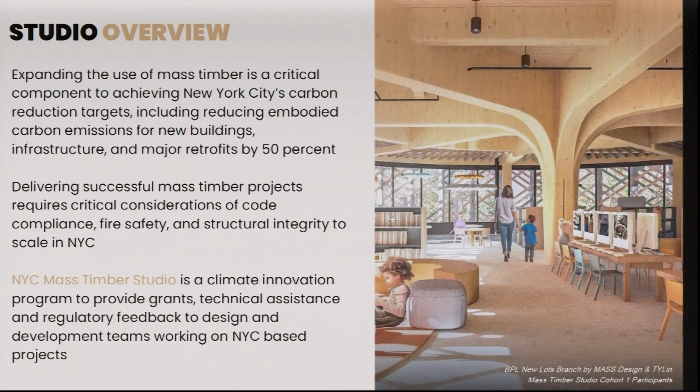Before we dive into presentations, I'd like to take a moment to frame what tonight is all about. The Mass Timber Studio is a climate innovation program designed to accelerate the adoption of mass timber safely and soundly within the 5 boroughs. Through grants, technical assistance, and regulatory guidance, the studio helps project teams navigate feasibility, design, and permitting challenges while building connections across industry and government.

Our objectives are simple, yet ambitious. The goal is really to advance real-world projects, identify barriers and enablers to mass timber construction, and generate insights that inform policy and market readiness. Ultimately, a lot of this work lays the foundation for a regional mass timber economy.

Cohort 2 represents 7 active projects across all 5 boroughs, spanning 800,000 feet of proposed development. These projects range from libraries and schools to affordable housing and civic rec centers. Many are located in environmental justice areas and showcase both ground-up construction and adaptive reuse.

As you listen tonight, I'd love everyone to pay close attention to how these teams are tackling design challenges, navigating regulatory pathways, and exploring materiality in ways that could transform our city's built environment.

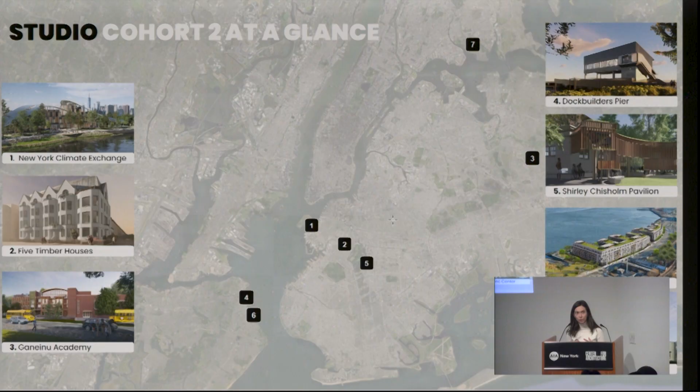And with that context in mind, let's now move into our first set of project presentations, focused on the intersection of design and code. These include the New York Climate Exchange, 5 Timber Houses, and Ganeinu Academy. Please join me in welcoming our first presenters to the stage.

Hi, everyone. Thank you for being here today. My name is Elifmina Mizrahi, and I am the Capital Project Manager for the New York Climate Exchange.

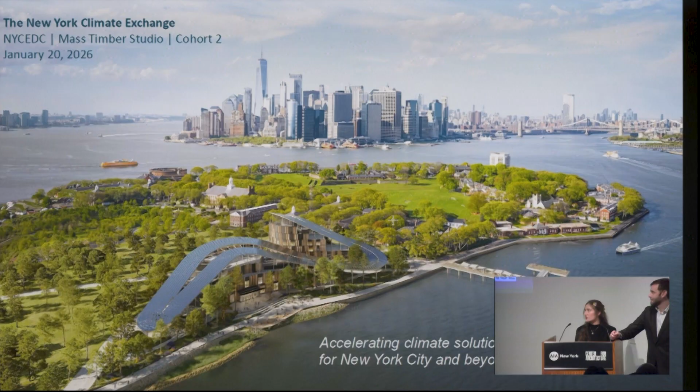We are so thrilled to be part of the second cohort of the EDC Mass Timber Studio, and we want to thank DOB, FDNY, and all the studio partners for making it possible. Today, I'm going to be talking a little bit about who we are, why we chose to build in mass timber, and what the studio enabled us to accomplish.

So who we are: we're a nonprofit organization focused on tackling the climate challenges facing our cities, and we're doing this through a 2-pronged approach. First, we're building a partner network, because to do anything in this world you need collaboration, and to fight climate challenges you need even more collaboration. Second, we're building a physical place for all that collaboration to happen. So we hope you join us there in 3 years.

Our network of partners is really a cross-section of who we think is needed at the table to solve these climate challenges. And if you look at our project site on Governor's Island, you'll probably notice 2 things. One, there are no bridges or tunnels that connect our island to the rest of the city, which means we have a lot of construction challenges unique to our site. Second, it's a relatively small campus on a relatively small island, but our ambitions are much, much larger than our square footage.

And like previous speakers have said, we recognize that New York City is a leader when it comes to construction, development, real estate, architecture, and we want to build this project to set precedent, to show people what is possible with mass timber.

Our project mission is really threefold. We want to advance urban resilience, we want to decarbonize our cities, and we want to build on the public nature of Governor's Island. The Trust for Governor's Island and others have done an incredible job making it a hub for education and inspiration, and we want to build on that feeling you get when you get to the island.

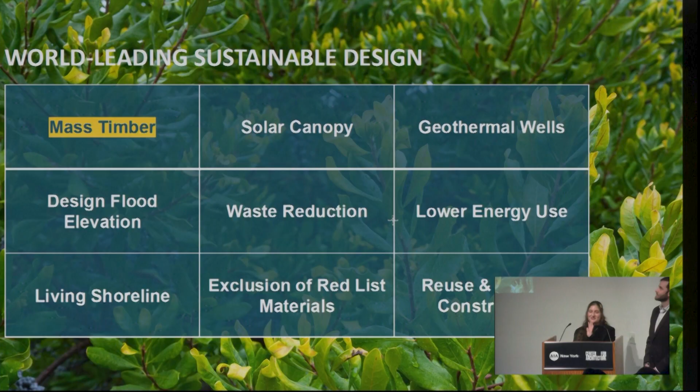Mass timber is only one of the components of our project. To really have a world-leading sustainable design, you have to have a comprehensive approach. So I'm not going to get into the details of what's on this slide — today is about mass timber, but it's only one of our components.

I want to take a moment to shout out our incredible team. I have the chance to work with them every single day. SOM, Skanska, MNLA, Buro Happold, Langan — these are real leaders in innovative and sustainable construction, and we're so lucky to have their expertise on our project.

So a little bit about our project: it's 2 large-scale commercial mass timber buildings, about 140,000 square feet total.

One is a convening center, one is a lab and classroom building, a research and education facility. These are the two mass timber components, but we're also adaptively reusing a historic structure, building 4 acres of open public space. We have on-site geothermal and solar, and we're partnering with the city to build a resilient waterfront.

We're hoping to serve undergraduate students, researchers, and also the general public. We want to invite people in and have people learn about what we are doing.

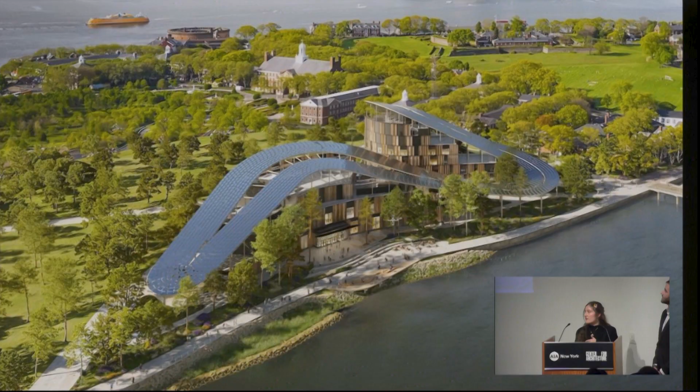So we are on the Brooklyn side of Governor's Island, right off the ferry terminal. This is a close-up of our mass timber convening center right on the waterfront. And we are actually so lucky to be at the front gate of the island.

So we want to engage visitors, whether they come to visit us or whether they are just passing by, through a very porous first floor where people can come in. And our interiors very much celebrate mass timber, showcase mass timber.

We want you to feel like, wow, why aren't all buildings like this? Why doesn't it feel great to be inside buildings?

So before I pass it to my colleague Connor from Skanska to talk about our project-specific challenges, I just want to take a moment to acknowledge the incredible work that EDC has done. It's really hard to be the first mover in anything. No organization wants to be the first mover because it's complex, it's costly, and it's encouraging to see that the city acknowledges this and is trying to help smooth the path forward for our project and also for all the other projects that are going to follow afterwards.

So we're thrilled to be part of the studio, and I'll pass it over to Connor to talk about our project-specific challenges. All right, thanks. Like she said, I'm Connor Devine, a project executive with Skanska, who's the construction manager for the Climate Exchange, one very small piece of a large dedicated team.

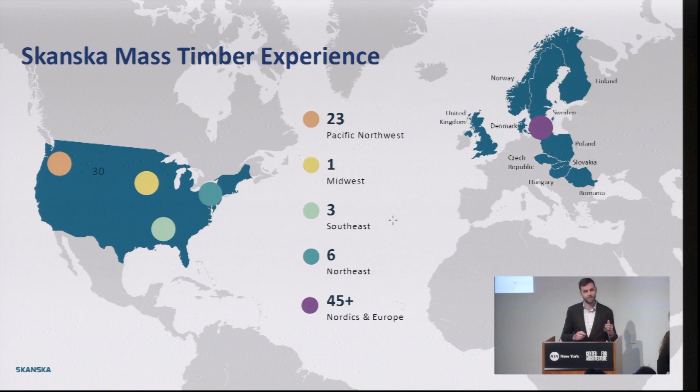I just want to start here. Mass timber experience for us in particular, we have a bit of it across the country and around the world, and that's really important for building mass timber at this scale of the Climate Exchange in New York City, because we have a lot of places to call on experience, whether that be the regulatory environment in a different city, state, country, whether that be construction best practices, design optimization, material sourcing, whatever it may be. There's a lot of people that have done this elsewhere that we can call on.

And then just to blow up locally in the Northeast, we've done a couple mass timber projects. Maybe unsurprisingly, a lot of them end up being in the higher education space. That seems to be where this is gravitated to most, climate exchange in a similar field. We're working on the Tompkinsville Esplanade, which is very much adjacent to one of the projects you'll hear about a little bit later today. That's the first project that we're doing mass timber in the DOB's jurisdiction. Underway, it'll be an interesting project, and we're excited for that as well.

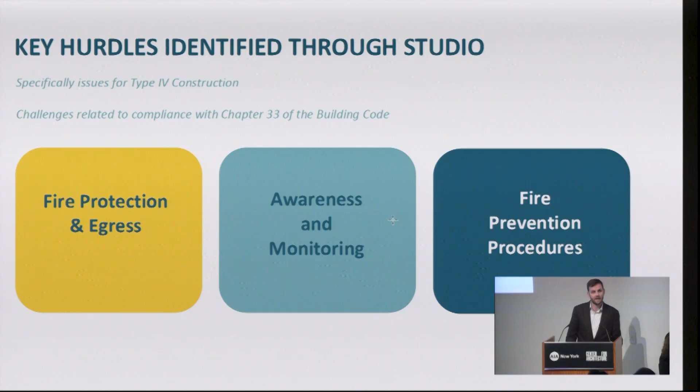As far as the overall studio, a lot of people probably have a lot of the same comments, but I think for us, the hurdles that we're trying to work through really broke down into two areas. One of them is the DOB's requirements for type 4 mass timber construction, in addition to just the general requirements of the International Building Code. And the second being the Chapter 33 requirements of the New York City Building Code, those being maybe not so much architecture, but safeguards during demolition and construction. So that's less the what we're building and how we're building it, the rules we have to follow. And again, there's been some specific requirements appended to that chapter specifically for type 4 buildings.

I'll just talk about a few of the things that we're facing, a couple of hurdles for our building in particular, and others in the cohort had similar things. The first for us is stair towers. As the code is written, permanent stair tower structure independent from the timber needs to be at least 2 stories above the working floor. For the climate exchange job, SOM put together a holistic approach to integrate timber throughout the whole structure to make that structure as sustainable as possible. So through the studio, we continue to work and discuss with DOB and FDNY on how can we go forth with that hybrid structure and make this truly as sustainable a building and a structure as it can be.

We're going to skip that, we're short on time.

Temporary protection of connections is another huge one. I think everybody in the studios had something to say about this, but effectively, the way the code's written, any connection needs to be protected at the end of a shift. Apply that to a steel building, and any connection would have to be spray fireproofed at the end of shift. That's the one-for-one comparison, so practically speaking, that's tough to do and costly.

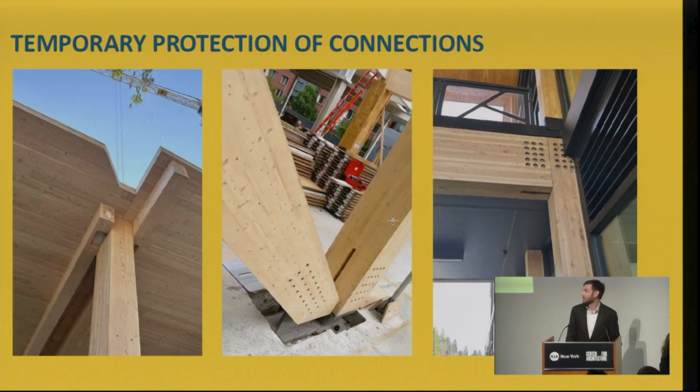We're really excited to have brought our design assist partner, Metropolitan Timber, on board. Eric's in this room somewhere, and their partners are all the way in the back, Aspect and Element 5. That team, along with SOM, has really dove deep into detailing and connection design so that the connection is made and the fire rating is there, rather than having to do it after and add all that cost. We're excited with the way that's going.

There's no opportunity for just-in-time deliveries, and no opportunity for staging trailers throughout the day. So we've had a lot of conversations via the studio, especially with the FDNY and the DOB, on how we can approach this given our specific constraints of being on an island. We have a couple different options we're pursuing, and we're excited to narrow in and agree on one together to make this job happen as effectively as we can.

That's all we have time for. It's a short presentation, by no means everything we discussed in the studio, but we want to say thank you to EDC for putting the studio together, to DOB, FDNY, and all the other partners that lent their expertise or lent their ear to hear about our hurdles and try to solve them. We're not there yet, but this is the starting point of a long process. Thank you guys for organizing this.

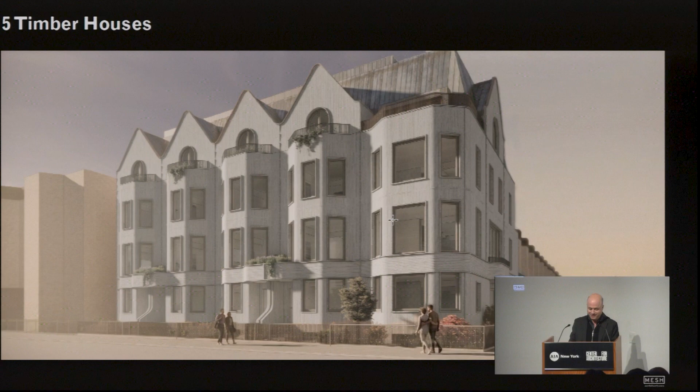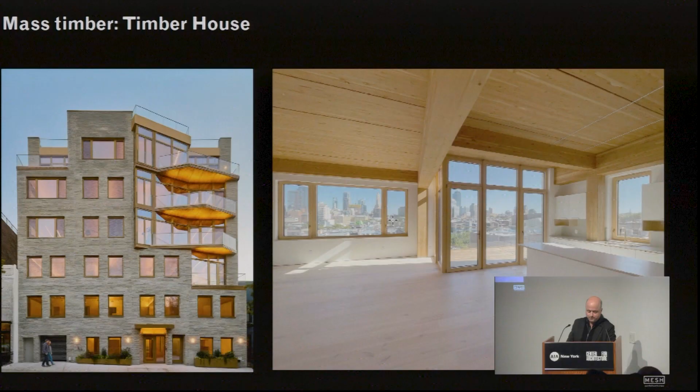We've been interested in doing passive house design, low energy house, for a long time, well over a decade. Then about 7 years ago, we got into mass timber construction and design. We've completed one, this timber house in Park Slope, finished a few years ago. We have a couple more happening: one house in construction and other houses in design upstate, in addition to the one you're going to see tonight. This is the one in construction.

Mass timber construction is an unusual process if you're used to the way concrete and steel buildings are built here in New York City. It's very different, and I think we're all still figuring out how to do it best. That's why doing this project, which consists of 5 houses in Park Slope, is actually instructive even for other kinds of buildings like the multifamily buildings prevalent here in the city, because as we learn techniques and assemblies, we can take those and use them in other places on other projects.

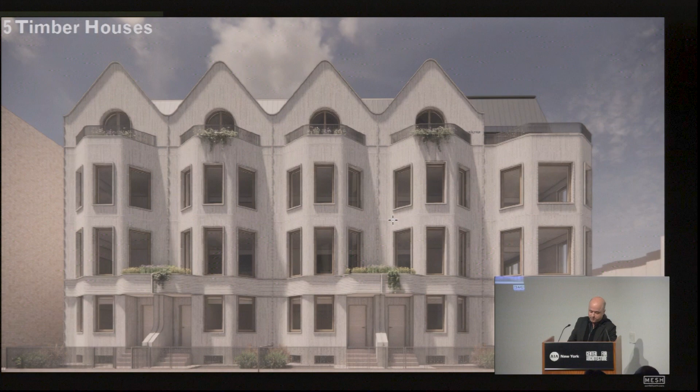So we wanted to know on this project, it was a program for 5 houses, can we do 5 CLT houses? If you're familiar with mass timber, CLT are those thick slabs made out of dimensional lumber. It's a material that's strong, beautiful, goes together quickly, has so many beneficial attributes, and of course very sustainable as a renewable resource. So could we build houses out of CLT, which we were not able to previously do?

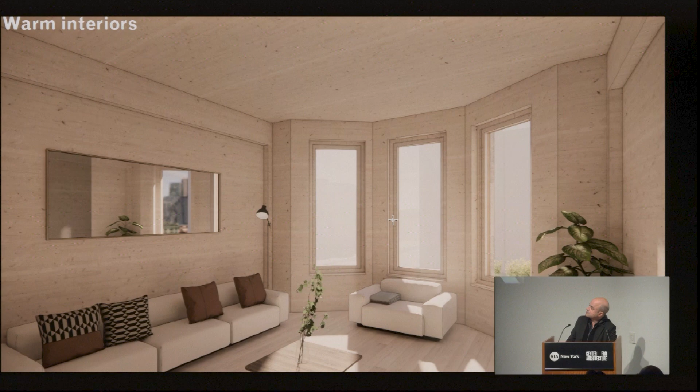One thing you get with mass timber is the structure being the finish of the house inside. Now outside you can't expose the mass timber except in select ways because of weather exposure. But it's great to have this material, which is the actual structure, be the interior of the house. It's both biophilic and it also saves material, because instead of having to put studs, sheetrock, spackle and paint, you can just finish it with the material that's actually holding the building up.

So we came up with different assemblies for how we're going to clad our building. Again, it's going to be built to passive house standards, so we have air sealing and insulation. This is an ultra low energy building according to the DOB's definition of that.

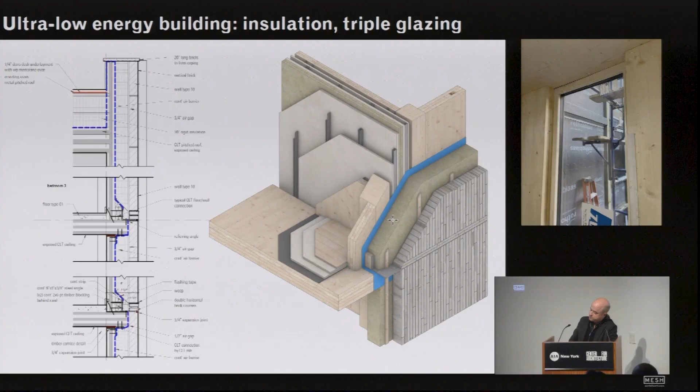So we spent a lot of time really working on the section of the house, how we do the envelope, and in fact how we do the space between the buildings, the houses themselves. We also have advanced systems here.

Everything, of course, is electric. We have very sophisticated air-to-water heat pumps—these are the ones that don't take the refrigerant out of the immediate environment of the machines themselves, and just circulate cold or hot water around the house, which is safer than delivering refrigerant all around the house. We use ERVs to provide conditioned fresh air at all times, and we have solar panels on the roof.

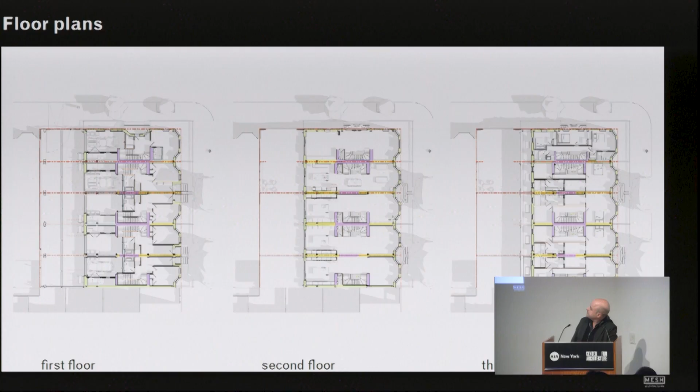The outside of the building, as I said, can't be timber, so we had great success on our previous building using these handmade bricks, which are beautiful. The whole neighborhood around this is in Park Slope—there's a lot of brick around there, so it's contextual, even though a lot of the aspects of the building are not similar to the neighborhood. But the bricks are beautiful, they're practical, and they're a good match for the mass timber structure that sits behind them.

So, like all the groups, we had our challenges, and the Mass Timber Studio was very helpful. The first thing was we started off trying to do all CLT. Then we realized that wasn't going to be possible because we learned that CLT shear walls were not legal. So we shifted to using concrete shear walls. And then we thought, well, we're doing concrete shear walls, so we'll also do a concrete party wall to help support our slabs.

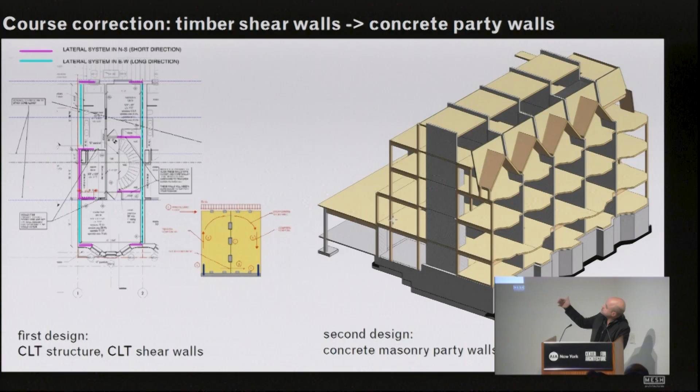Then we learned that the concrete party walls were not going to work—party walls are not good for 4-story buildings in New York City. So instead we shifted to a post and beam structure. So we have a glulam structure with CLT floor slabs.

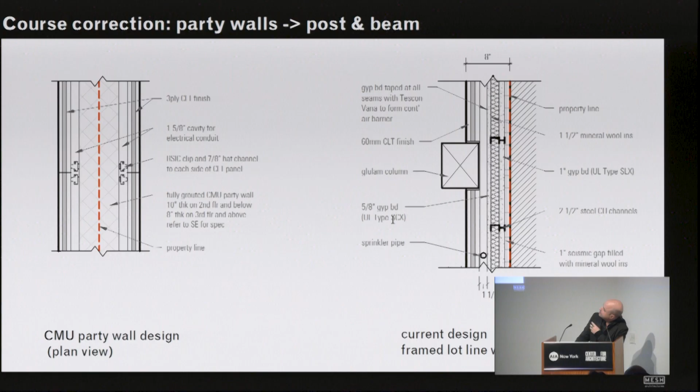We make this concrete transparent—you can see the glulam structure there. This is how it looks in plan. And then we have a pretty elaborate but good firewall assembly between each pair of houses with the glulam structure. This is how that looks, the structure. We have great partners—T.Y. Lin is our structural engineer, and we've had a great experience working with them to develop the structural scheme.

And we have to deal with protecting our connections. It's one of the big hitches. We also have to deal with Chapter 33, which is a difficult thing to do.

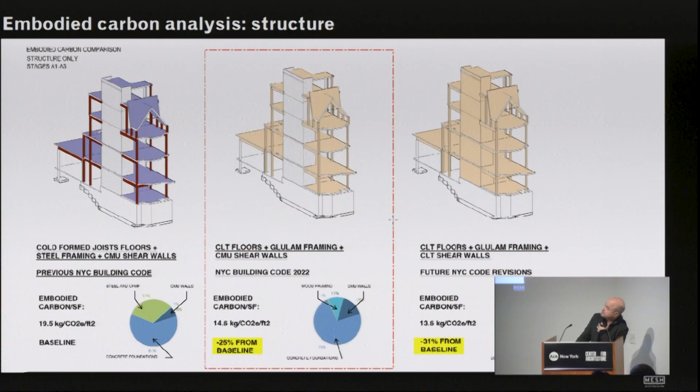We did a nice analysis. This is from T.Y. Lin's analysis of how much embodied carbon is saved in the structure compared to the base case of a steel frame building with concrete decks, 25%. And this does not count the other savings we get, for example, not having to use a lot of sheetrock and other materials, so it's a much more lightweight structure.

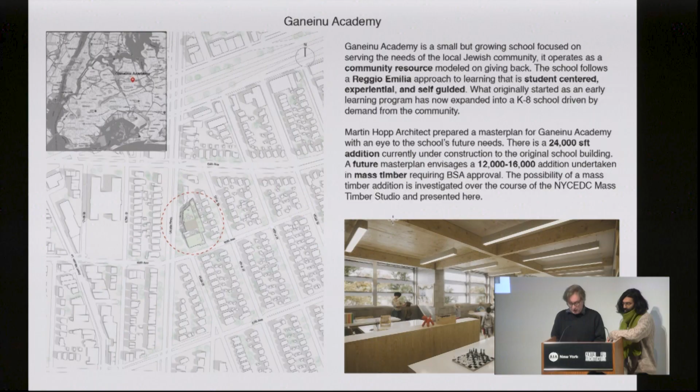Currently under construction is a cellar plus 2-story Type 3A concrete addition, filed under the 2022 NYC Building Code. The new and existing buildings are separated by a 3-hour vertical fire separation, and this phase fully maxes out the allowable FAR. Based on the school's long-term program needs, we designed a future 12,000 square foot phase requiring BSA approval.

That phase was intentionally limited to match the residential FAR and envisaged as a Type 3 addition. Prior to the 2024 Mass Timber Bulletin from DOB, a mass timber approach would have been viable. After the City of Yes was approved in December 2024, we reassessed the project and found it could support roughly 4,000 additional square feet, effectively an extra floor.

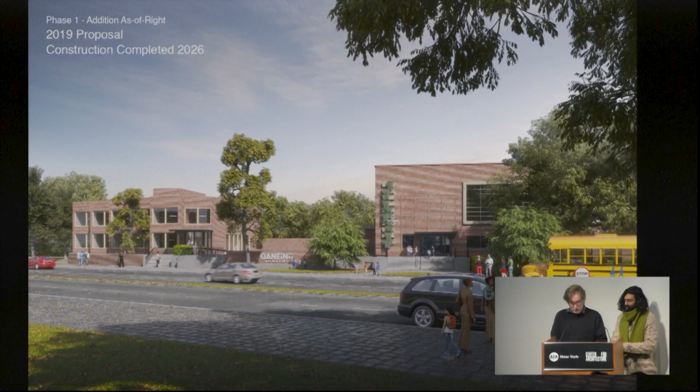So in New York City today, there are extremely limited pathways for mass timber vertical expansions, and effectively none for educational buildings, especially in the context of our project.

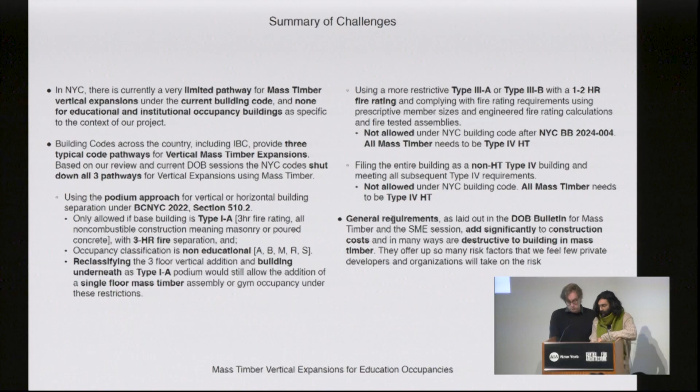There are 3 commonly accepted approaches used everywhere else: a podium approach, or a Type 1A with a Type 1A base; a Type 3A or B mixed material approach; and where IBC 2024 is being followed, a Type 4A, B, or C approach using mixed construction materials. None of these pathways are currently available in New York City following the 2024 Building Bulletin.

The podium approach does not allow education occupancies above the podium. It could, however, allow a single-story mass timber addition, such as an assembly or cafeteria space, if the building were reclassified as Type 1A. This approach was previously acceptable and as-of-right, but is no longer permitted under the bulletin, which requires all mass timber to be Type 4 heavy timber. Reclassifying the entire building as Type 4 heavy timber introduces cost and risk levels that the client considers unacceptable.

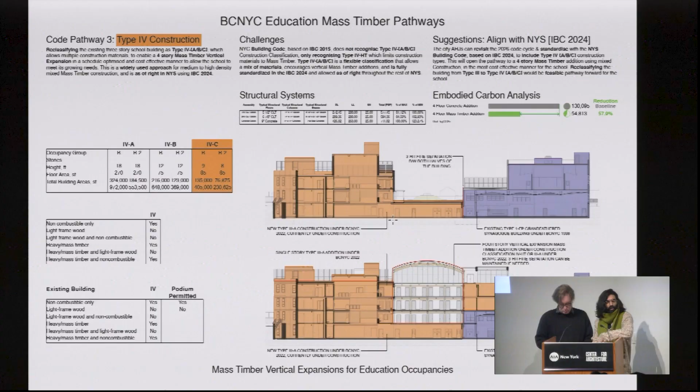For code pathway 3, for type 4 construction, you can use a mixed construction classification, and that was allowed as of right until very recently. However, we can no longer do it. Our suggestion moving forward is to realign the code with the prior understanding of type 4 mass timber construction, or a type 4 approach, which is followed throughout New York State, but the city currently follows IBC 2015. A type 4 mixed construction system would again allow for infill and overbuild construction using mass timber to happen in the city.

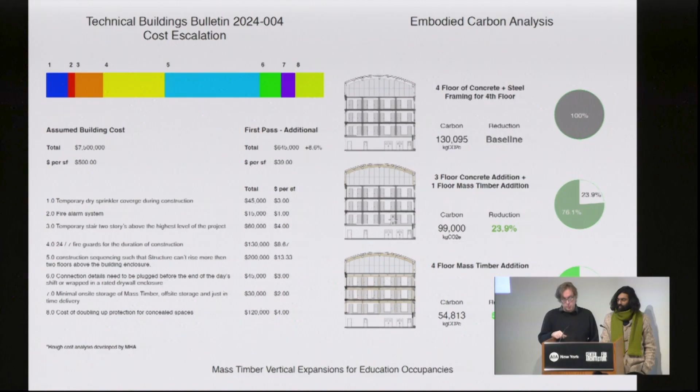What we also see in undertaking an embodied carbon analysis is that there are great opportunities. A 3-floor concrete addition with 1 floor of mass timber addition led to a 24% reduction against the embodied carbon baseline. If we did the full 4 stories in mass timber, that led to nearly a 58% embodied carbon reduction. So we're seeing great embodied carbon opportunities alongside challenges in the regulatory process, which scares off private developers, we think.

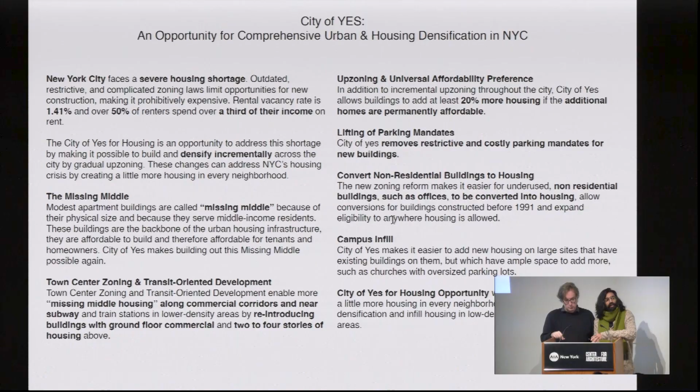City of Yes, which was approved in December 2024, allows incremental housing and incremental development throughout the city. We believe that City of Yes, in conjunction with mass timber, creates a massive opportunity for densification throughout the city.

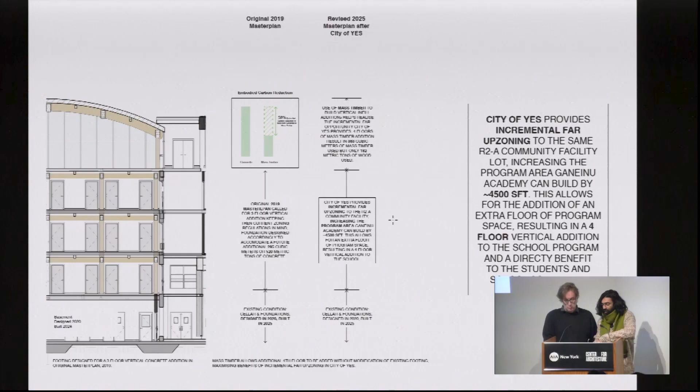For Ganeinu, this meant that the original building in 2019, the master plan envisioned three floors comprising approximately 520 tons of concrete over the existing foundation for the final phase. With the City of Yes and the revised master plan, we could add another 4,500 square feet of additional program space, and mass timber made this possible. Four stories of mass timber add roughly only 200 metric tons of load, less than half what the concrete weighed, while achieving a 58% embodied carbon reduction.

After 2025, if we step back further, mass timber reveals an even greater infill potential. Without zoning limits, the existing footing could support another 5th floor of education occupancy. And if this were converted into a residential building, there would be a 6th floor that could be added without modifying the foundations. Mass timber overbuild supports densification, mixed use, and adaptive reuse.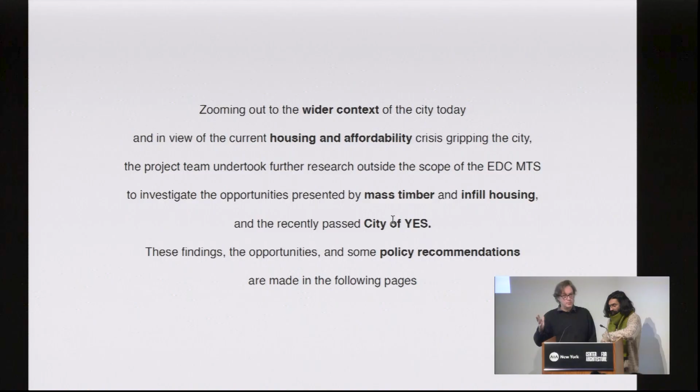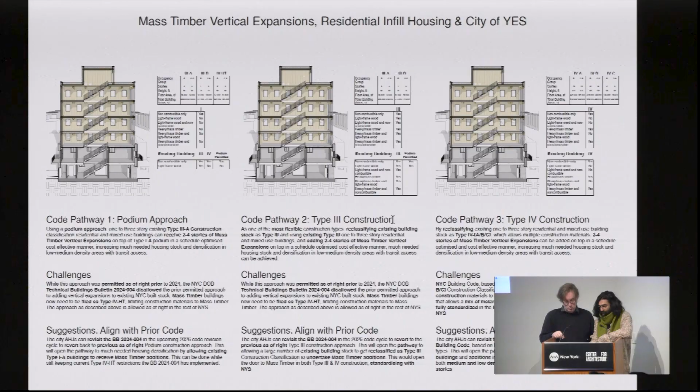We tested this with a 2-story mixed-use building in an R6 transit-oriented neighborhood in Forest Hills, Queens. City of Yes allows residential FAR to increase from 2.2 to 3.9, a roughly 9,400 square foot addition, and additional height going up to 90 feet. Using mass timber, we can add up to 3 floors, or up to 9 to 14 housing units, leaving the existing building largely undisturbed. The most sustainable buildings are the ones that already exist, and the best canvases are the ones that we already have.

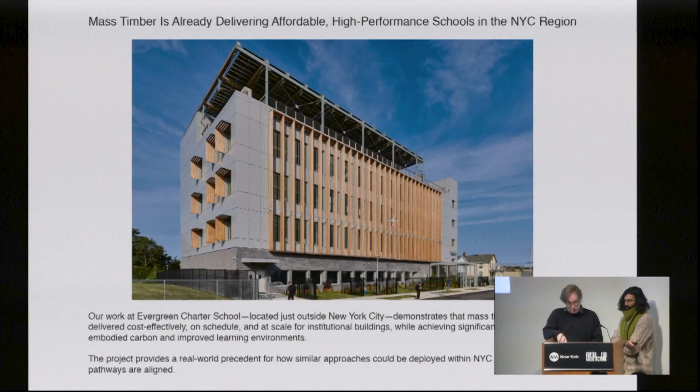Evergreen Charter School, located in Hempstead just outside the city, a project that we've just completed, demonstrates that mass timber can deliver affordable, high-performance institutional buildings at scale, just outside of New York City. It provides real-world precedent for what becomes possible when regulatory pathways align.

We believe New York is leaving economic value on the table by not enabling mass timber construction, despite in-state forest resources and regional manufacturing potential. New York City is also missing low-risk opportunities to add housing through vertical expansions on existing 1 to 3-story buildings. The current DOB guidance unintentionally limits those projects by restricting construction to type 4 heavy timber only, while other jurisdictions allow more flexible mixed material approaches. Prescriptive requirements in the Mass Timber Bulletin, Chapter 33, increase cost and risk, making many projects difficult to finance. We think that with targeted code alignment, without compromising safety, we could immediately unlock schools, housing, and mixed-use vertical expansion citywide.

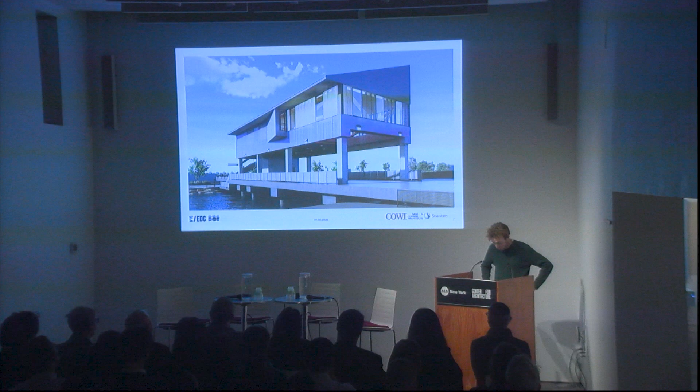This is kind of an exterior rendering of our building. We're located on Staten Island, near many other CLT projects that we've seen today.

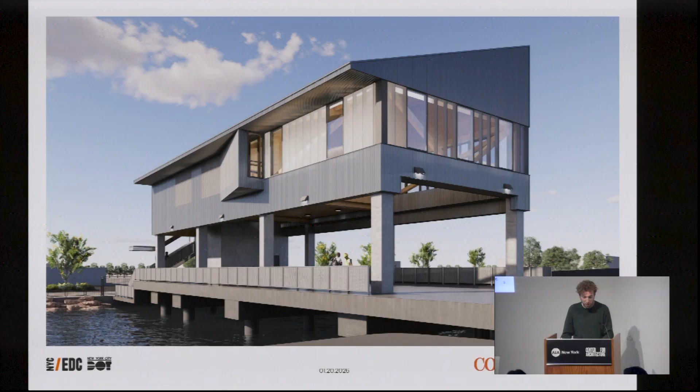Just to stage set, whenever we show this project or talk about it, we're often asked two questions initially: one, who or what are the dock builders, and two, why did we choose CLT? The dock builders are a team of DOT hyper-specialized employees who go around New York City's waterways, critical infrastructure, and maintain piers, piles, and docks. And why CLT? Beyond the environmental benefits we've already talked about tonight, there are its aesthetic qualities, and there's also a long history in both New York City and global maritime architecture and design of using wood and timber. We thought that this building, operating on a working waterway and for the dock builders, would be a great nod, both materialistically and historically.

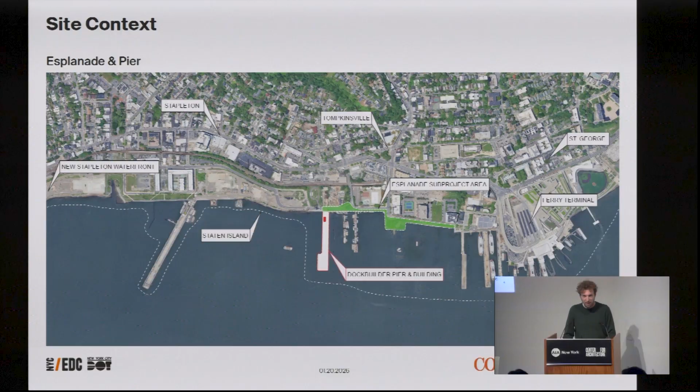So the project, again, we're on Staten Island, probably easiest to locate yourself by the ferry terminal. We're part of a larger redevelopment of the Staten Island waterfront, this new esplanade, where this little red square sits on this larger new pier, and towards the left of the screen is the new Stapleton waterfront project, which we're going to hear about next. So lots of exciting CLT and mass timber happening in this little area.

There's material storage, loading of barges, truck access, and so it's really a very active site, and we're right there in the middle of it.

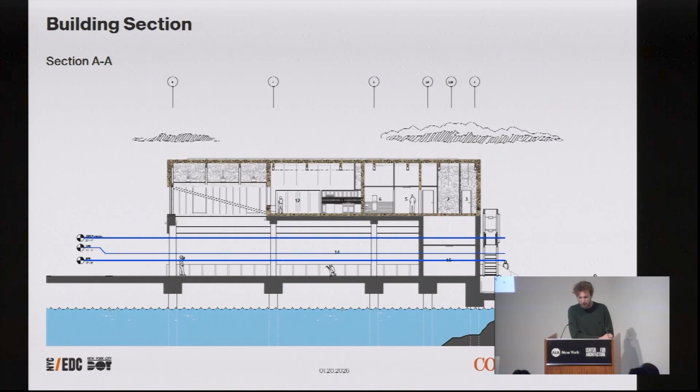That top line is the Mayor's Office of Climate Resiliency and Social Justice, I forget the whole name, but that's that top line. This is the section looking through that double height space, that open working area, towards the building.

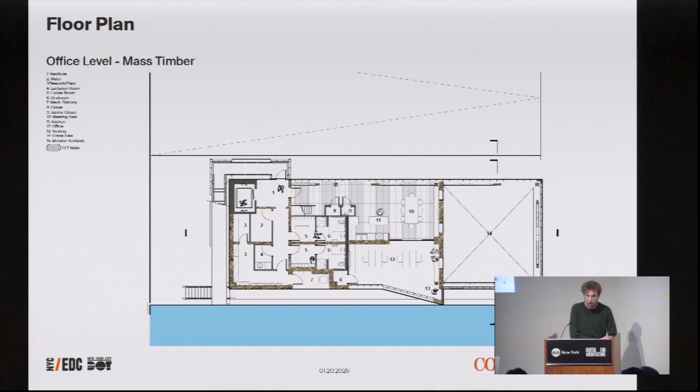Above is really where the CLT kind of takes off. This is where the majority of the structure is all CLT and glulam, and there's a bit of program, but we can go into that later.

Some of the interior, and a bit of a shout out to the associate we worked with, Kit, in the middle of the rendering. The interior here has got that nice warmth we're all gravitated to with timber. We're leaving it largely unfinished, just a single clear coat.

This is kind of a view looking out from the office, where we're really trying to visually connect the administrative operations of the dock builders to be able to observe both the open working area as well as the waterway action.

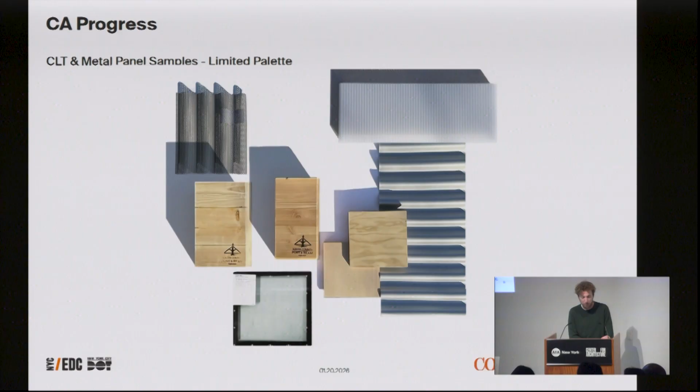We kept it to a really simple material palette. Things can work if you pick good materials, you don't have to do very much. So we have a lot of wood for the interior, some corrugated metal paneling, both perforated and solid, polycarbonate, and bird-safe glazing.

But then, lessons learned. This is where I think what we went through in the studio really shines in the Mass Timber Studio. So this is a bit of a diagram making it clear where the CLT exists, and some of our connection details, which I'm about to go into.

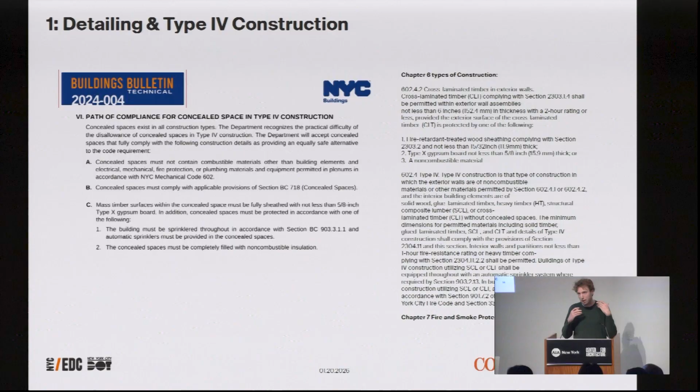I want to pause, and I know I speak fast, so I'll try to go slow here. We started designing this building in 2018. It's now 2026, and this bulletin came out in 2024. So a lot of the detailing and design that we worked through, as we all do, changed a lot. The code landscape we designed in is not the code landscape we're living in now, and there's been a lot of updates we've done to our drawings.

Our Skanska CM team is here somewhere, and they've been incredibly patient and helpful as we've had to proactively adapt our building envelope to meet these bulletins. So, maybe tongue-in-cheek, we've labeled this slide 'Type X GWB solves all problems,' and I think if anyone has read the bulletin, it kind of does solve all problems.

But it also means you're constantly revising your air barriers, looking at your envelope over and over again. That's something we've been working through quite a bit, making sure we're staying up to code.

Another issue is concealed spaces. If Type X GWB solves all problems, so does mineral wool, right? If you can't sprinkler it, you have to fill it. These are two areas we looked at really closely, just two examples that exemplify these two conditions.

Here we're looking at one area, an eave on the building, as well as the pier level condition. Originally these areas in blue were just designed to the energy code minimum for insulation, and after that bulletin, it just got filled up.

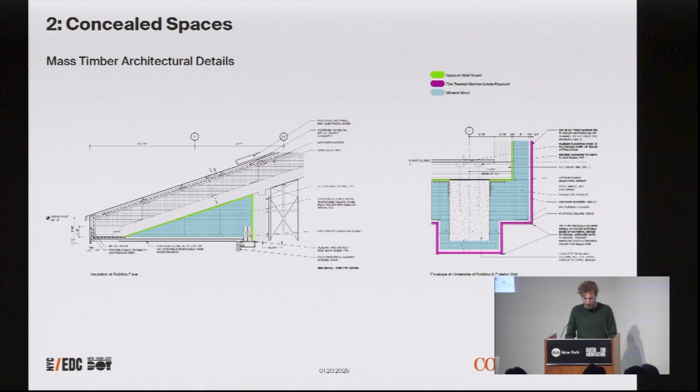The before connection here, we have a large knife plate, lots of exposed steel, lots of exposed connections. Our CM and construction team came up with some very creative details to tighten this up and put everything inside the timber itself. I think this is a rare moment where the building code leads to a better building, aesthetically at least, where we're able to really tighten up the envelope and conceal those connections—and that's happening not necessarily by us or by our design, but by the regulatory environment we're following.

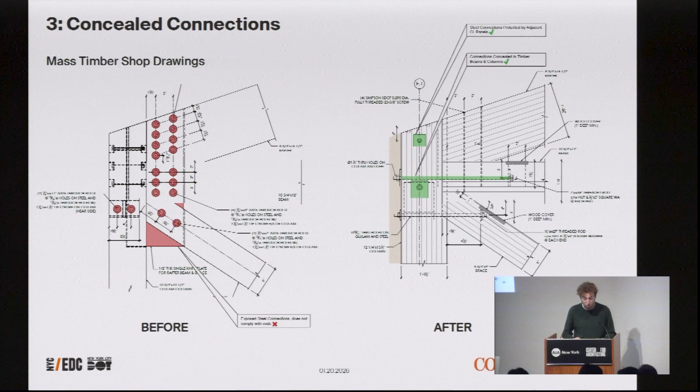This kind of harkens back to the first presentation about material storage and staging. We're working on a pier, and they're only pouring up to the building before they finish, so we have almost no area for material storage or CLT storage. Even if we did, it's about 2 trucks. So the plan that's been devised is this kind of tri-state journey: we're staging the material in Rhode Island at the CLT manufacturing site every morning at some ungodly hour, driving down for a just-in-time delivery in Staten Island, crossing 3 states—which, I'm not waking up that early, but whoever is, good on you.

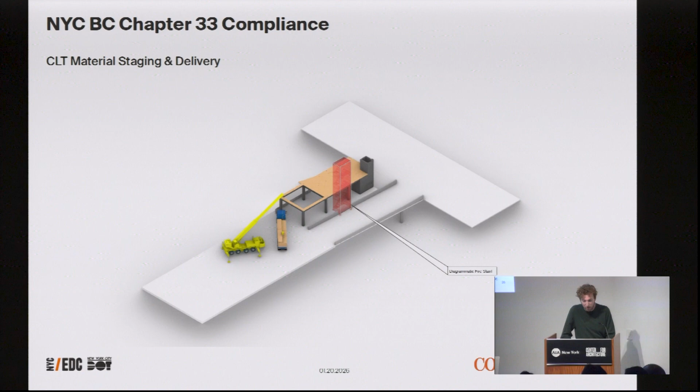This is a fun little animation we put together—not means and methods, but something to highlight how this might work. Our CLT shows up, our very diagrammatic fire stair appears two levels above the working deck. That's all on until there's this little magic moment where our stair appears, the steel stair on the outside of our concrete structure. Fire stair can leave, truck leaves, and then the building gets finished.

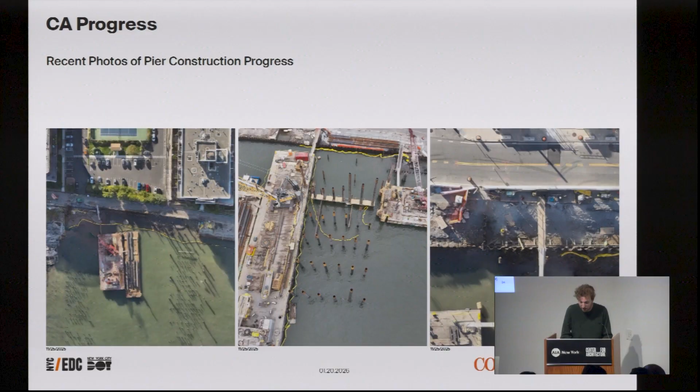Just to keep everyone updated, these are some photos showing some current progress on the building. We have piles in the water, which is really exciting, some of the bulkhead being built on the image on the right, and most recently, a colleague of ours rode his bike by and showed some of the pile field that they're looking at. And that's it, thank you.

Good evening, I'm David Yum from Prospect Park Alliance. Prospect Park Alliance is the nonprofit conservancy that works very closely with New York City Parks. We're sort of the forgotten or misfit sister of New York City Parks.

Prospect Park, unlike the more famous Olmsted park here in Manhattan, is truly the heart of the community. Central Park gets many visitors, many from out of town, but Prospect Park really is the backyard, the lifeblood of so many people. One of the great things about being in the design and construction department at Prospect Park Alliance is that we get to know each of our 29 historic structures really well. We get to see them throughout the week, all year long, but more importantly, we get to see and interact with all of the users every day and see how they use the park, how they use it well, where they can use it better. I think it's not only this opportunity to really know our client—and we are our client as well—but over the years, we have a client that we truly deeply care about because we're with them all the time.

Prospect Park, many historians say, was one of Olmsted's great park designs. He loved it.

10 million visitors every year sort of attest to that. But when it came to designing the Shirley Chisholm Pavilion, Shirley Chisholm was this figure that's so beloved by so many communities on the east side of the park in Brooklyn. It was also this great opportunity and almost obligation to practice what we preach in terms of sustainability.

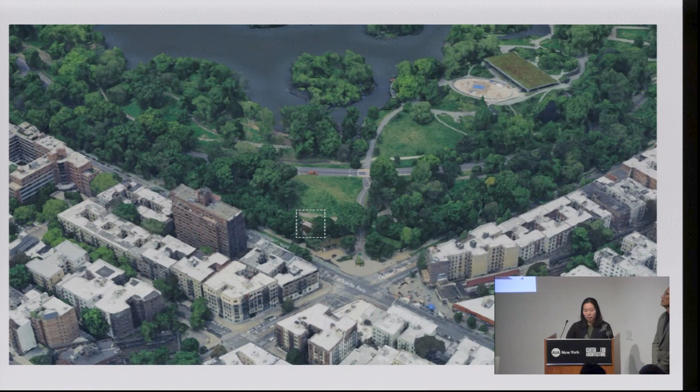Currently there's a disused restroom there, dashed in. The restroom was not a part of the original Olmsted and Vaux plan at Prospect Park. Alliance is always looking at the historic Olmsted and Vaux drawings and trying to understand the ideas of this landscape architect. This restroom was built in 1930, designed by J. Sarsfield Kennedy, the same architect as the picnic house in Prospect Park, if you're familiar.

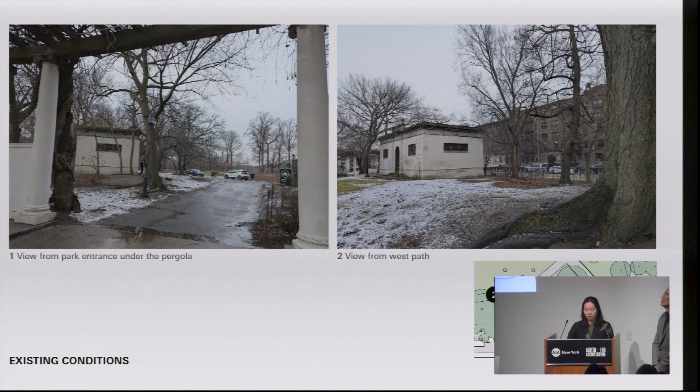This is the current view of the site from the southeast entrance to the park under the historic pergola, and then a view from the west on the right-hand side.

Because this is a publicly funded project, the program of the pavilion was developed after many community input meetings held at different spots around Brooklyn. It showed us that community members' most important priorities were a working restroom, a shaded seating area, and importantly, information about Shirley Chisholm's life and legacy.

The siting of this pavilion was very important. As you can see in the circle on the bottom right-hand side, the future Shirley Chisholm Monument, which is upcoming hopefully this year, is very close by.

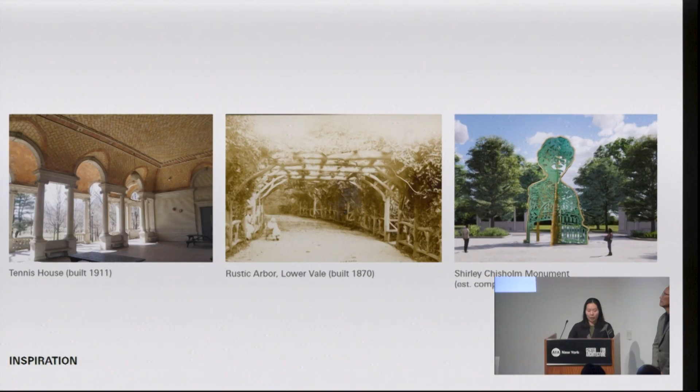We're also very inspired by historical elements around the park in all of our projects. Our design inspirations included the terracotta in many of the historic buildings, including the tennis house and Willink restroom. Rustic timber structures influenced our desire to use mass timber, of course, along with sustainability. And then the Shirley Chisholm Monument at that corner. And of course, Shirley Chisholm herself, who was a bold leader in the Brooklyn community before becoming the first Black woman elected to the US Congress.

Although our project is still in schematic design, there's a few building elements that will remain throughout these iterations. Notably, the terracotta screen on which display panels about Shirley Chisholm's life and legacy will be displayed, the mass timber branching tree columns, which I'll talk about more, and the CLT green roof.

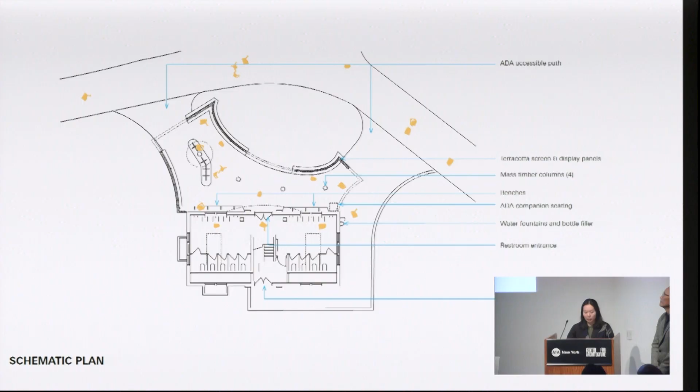As you can see in one of the iterations of our schematic plan, we show four mass timber columns in the center, supporting the covered seating space with a terracotta screen all around, as well as seating abutting the existing restroom and attached to one of the columns.

To go more into the mass timber design aspects of the building, the technical assistance sessions that we took part in as part of the Mass Timber Studio program were really helpful. Woodworks was able to provide us, on the left-hand side, examples of mass timber column designs that were very close to our design intent and helped get our juices flowing in terms of connection details and how to talk to our structural partners at Arup.

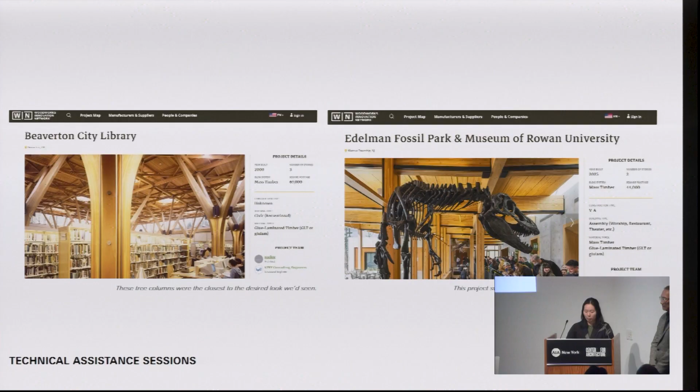And then on the right-hand side, this project is a publicly bid project similarly to ours. This means that we have another kind of consideration in terms of procurement, because the publicly bid process means that the mass timber partner that you work with during design may not end up being the one that's chosen in the end, which can provide some design inefficiencies. So that was an issue that we were investigating.

We were also able to schedule some fabricator calls due to these bid concerns. We wanted to start conversations with fabricators early, to understand their capabilities, the species, the size constraints, and their manufacturing capabilities in terms of machinery. That was also very helpful.

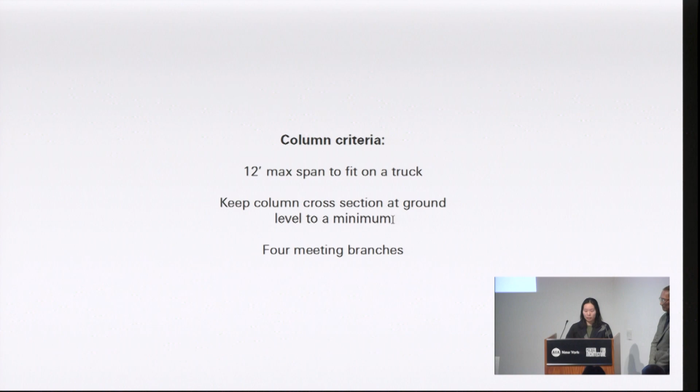Our column criteria was important, since the column was the most important mass timber design element of this project. The criteria was that the max span would be 12 feet or less to fit on a standard truck, to keep the column cross-section at the ground level to a minimum since this is already such a small project, and then to have 4 meeting branches come into a column.

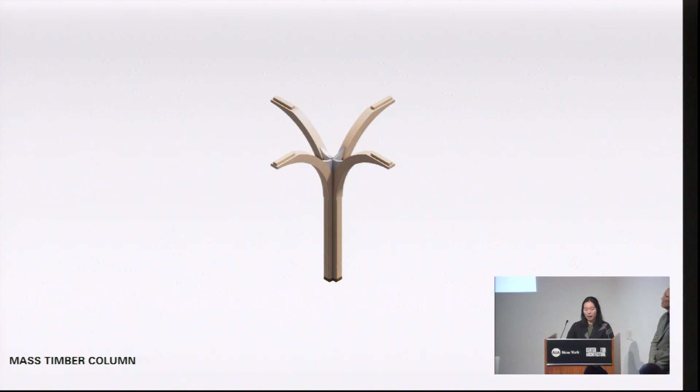We worked closely with our structural engineering team to study different column geometries, including triangles that would meet into a square, a version where a steel plate becomes the connection point between the branches and the columns, a cruciform column, and even a hexagonal column, which is essentially the same structurally as the cruciform but with some infill to create a different look. In the end, the cruciform column was the best balance of form that we liked and a small cross-section, and it didn't require large visible steel connections.

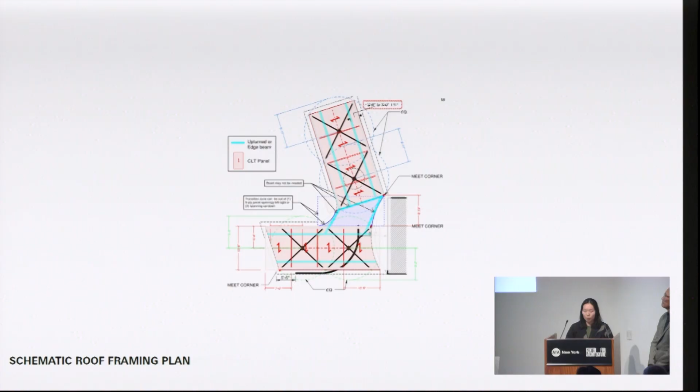Four glulam branches come together with a steel crown and a base plate. Here's an example of a framing plan for a slightly different plan configuration, showing how the CLT roof spans would work with the branching columns, giving you an idea of the issues we were working through.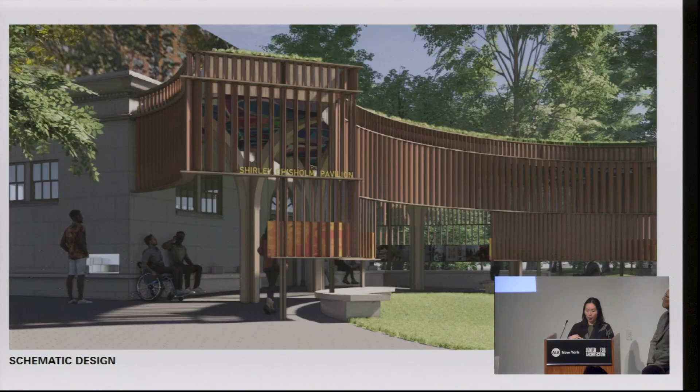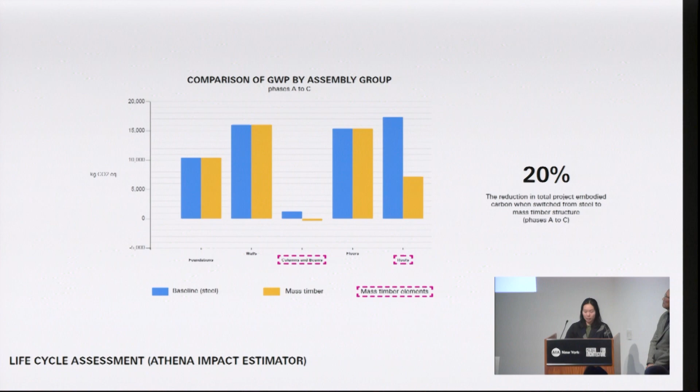We were also able to conduct a life cycle assessment using Athena Impact Estimator, and found that when we switch from a baseline of steel columns and roof to mass timber, the total project embodied carbon is reduced by 20%. Notably, the mass timber columns and beams netted a negative global warming potential, which was amazing.

Looking forward for our project, this shows our current timeline. Because we're building on a landmarked park, we're in the midst of working through public reviews with landmarks, and afterwards we'll be able to start the construction documents process, et cetera.

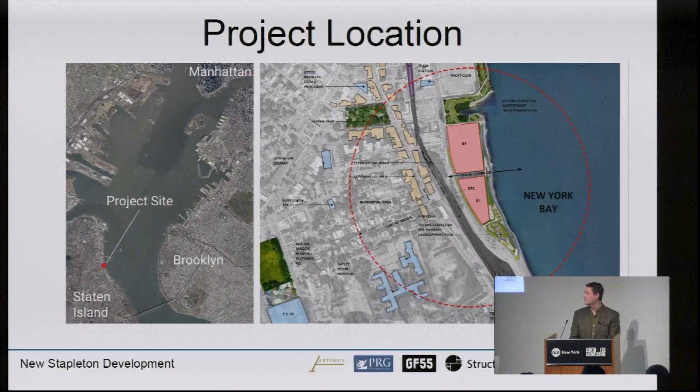We've been working on this project since the successful award. We're currently just in schematic design, so we're at a very early stage of development. This presentation is focused on some of our early studies into designing a large residential mass timber project.

Some project stats: the project is spread over 7 separate buildings, split into two massings. We have a 1-story concrete podium at the base of the building, for a number of reasons, but most importantly due to the flood zone we're in—this being a waterfront property, flood design is top of mind.

So there will be a lobby and parking structure in the first level, followed by mass timber built above that. Our height is 65 feet, which is restricted by the Type 4 heavy timber building code, the currently only accepted mass timber type here in New York City. So we are restricted to a top height of 65 feet.

We're considering many different options. CLT has been mentioned, but also obviously DLT or others are in the running.

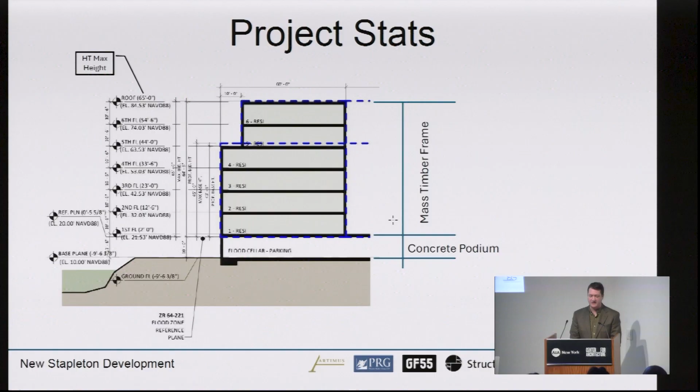As part of our initial studies, these were a number of framing options that we started to develop. One of the challenges with working with residential, especially multifamily residential here in the city, is oftentimes these layouts are like jigsaw puzzles, right? Closets go here, bathrooms go there, kitchens go here. It's sort of a maze of different walls to get the most out of your floor area. And that usually lends itself to a flat plate concrete construction. If you're familiar with construction here in the city, most residential projects will pursue that building construction type.

With mass timber, we work on more of a regularized type of system, meaning that we have to have somewhat consistent column spacings and much more of a linear design. Another thing with mass timber is the biggest driver of mass timber volume is the thickness of our deck, and that was a huge driver here when considering these framing studies. Going from a 5-ply, about 7-inch thick CLT, or 6-inch thick DLT deck, to a 3-ply or 4-inch DLT deck saved a lot of timber volume and came out to be some of the lower volumes that we were showing here.

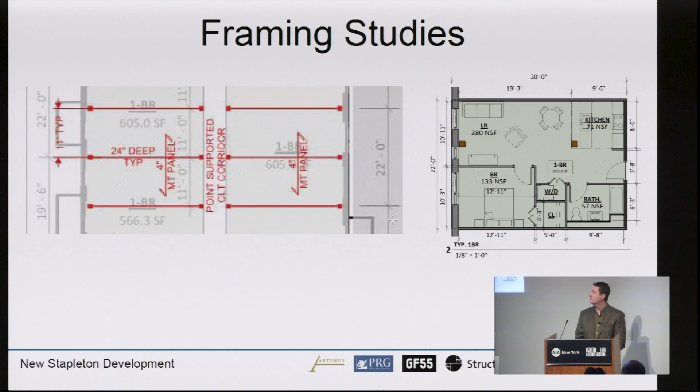From there, we continued the development of that 11-foot grid, but one of the key innovations that we came up with was actually skipping a column on the exterior of the building. So while we were able to keep the 11-foot spacing to keep the thickness of our mass timber panel low, skipping a column on the exterior is going to allow us more flexibility when it comes to placing balconies, designing the fenestration, and also just laying out the apartments in general. So the skip column design on the outside, I think, is pretty unique when it comes to other mass timber buildings I've seen prior. It introduces a girder on the exterior, but allows a more column-free facade.

Another big challenge that we were coming up against was this setback that I mentioned before at the 5th floor. One of the nice things about skipping these columns on the exterior is we are able to align a transfer girder. Instead of every 11 feet, we will have a transfer girder every 22 feet. Being that it's carrying load from above, our transfer girder is going to have to get deeper.

One of the things we are looking at is, instead of using what might more traditionally be a glulam beam, using a steel flitch beam instead, in order to keep depths reasonable. Incorporating steel where it's necessary and useful is one of the key drivers of our design philosophy, while still using as much mass timber as you can.

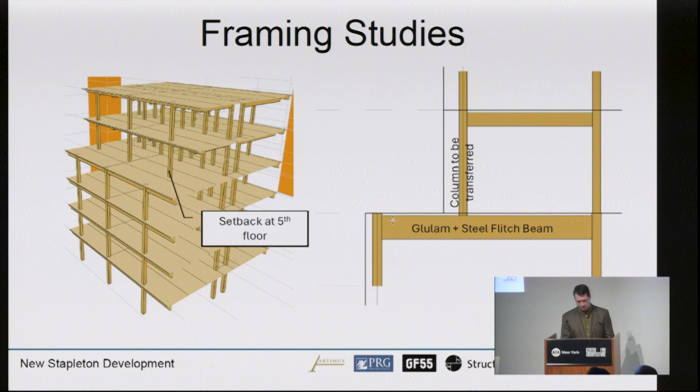We conducted a life cycle analysis. Like I mentioned before, a baseline building for this type of construction would be a concrete flat plate building. I think if this were maybe 10 years ago, that would just be a no-questions-asked type of design. But as you can see from the analysis, using mass timber gives us amazing benefits when it comes to embodied carbon, a lot of which comes from the sequestration of the timber.

We're still at a very early stage, still figuring out procurement, so a lot of these numbers were based on national averages but could be refined, especially if New York State is able to bring on more manufacturing capabilities, rather than having to source our mass timber from places such as Europe, the Pacific Northwest, or Canada.

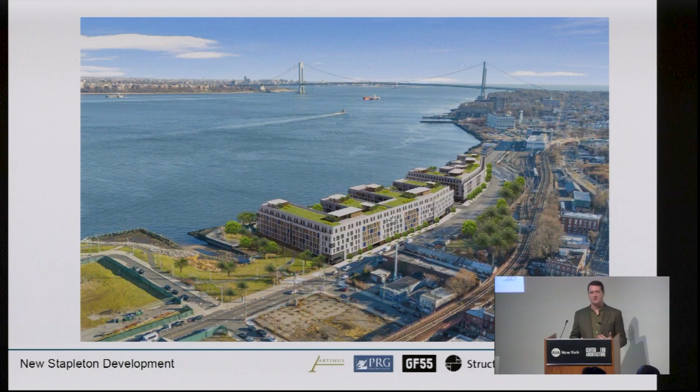So I'll close with some final images of the site. One of the benefits shown before of mass timber for residential use is biophilia. You don't need to finish the interior surface - you don't need spackle or gypsum everywhere. You can live inside a building as humans have done since the dawn of time, living with a natural material, living with wood, having it exposed on the interior.

I think this project is going to be an amazing one to see. These views are going to be unbelievable, and combining that with the warmth of wood is going to make for a really special place. So thank you everybody, thank you to EDC, really appreciate it.

Okay, we're the caboose. Typically when it's the middle of January and it's 15, 17 degrees outside, the attendance attrition is high, but not when it's mass timber. It's still packed - I can't believe we're all still here. It's almost 8 o'clock, it's amazing.

So we're here to talk about Soundview Recreation Center. This is an internal rendering of the gymnasium, which features the main component of the mass timber for our project. This was done in collaboration with many incredible partners - Snøhetta is the architect for this project, and they assembled a stellar team.

Before we dive in, I want to shout out EDC and the partners for this cohort. I think it's such a refreshing moment in time in this city around mass timber, and all of you being here is a true testament of that. Kudos to the city and the EDC for really pulling this together and pushing us to think like this.

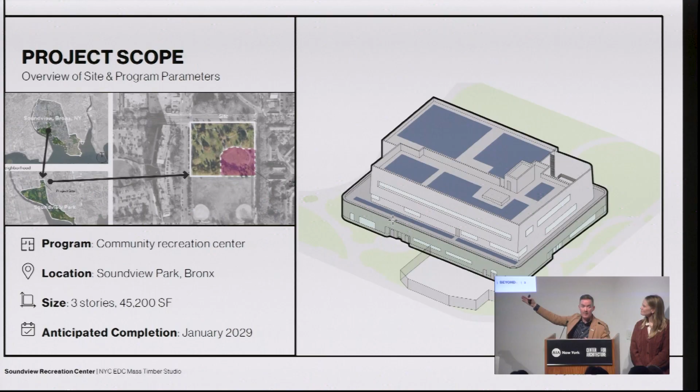I'll just say really quick before we dive in, this project from a sustainability perspective, because we are the sustainability consultants, is quite robust. It's pursuing LEED Gold, we're teetering on platinum. It's got geothermal wells, we're going to talk about EO 23, which a lot of you know about. It's got the green roof, which complies with Local Law 92/94. So there was a lot of really progressive policy from the city that drove the design, which will show you why mass timber really just made sense for this project. It wasn't really a super deep analytical process, although complicated, but how we came to find ourselves with the solution of mass timber was just what made sense for this project.

So some of the design goals that Snøhetta had put out for this project include inclusivity. We wanted this project to be welcoming to everyone, and so you'll see that in the design, very inclusive, very front door to this park. Enrichment, so offering program that enriches the neighborhood all hours of the day. Connecting people to nature and natural systems.

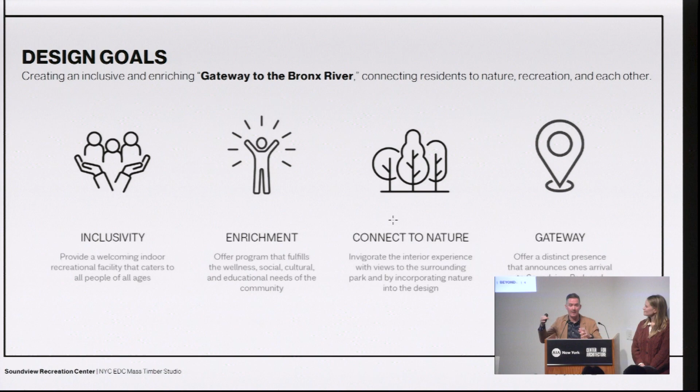Allison and I are really keen on this, we've heard biophilia mentioned every single project tonight, which is amazing. Allison and I come from a background of biophilic design, so hearing that is really important. And so this project, we wanted to ensure that the connection to nature and natural systems was not just in the park, but also the mass timber components. And then, of course, a gateway. It was meant to be a gateway to the park for the people who live in this community.

So again, just a little bit about why mass timber. I think that was a question we've all been asking about this pursuit, because it is complicated, as we've all discovered. But again, it was a natural conclusion of all the sustainability drivers, Executive Order 23, which of course you have to measure your embodied carbon for city projects.

Connecting people to the park, supporting occupant wellness. We've heard people talk about the lovely tone and the connection to wood and how that makes us feel, which is very important. And then also being strategic about where we put it. So a lot of sports facilities can feel very cold and very sterile. But when you do something like this, and you have a lot of natural light, it feels very warm and very comforting. And so I think that was really important for us.

And then of course, just as I mentioned, the larger city goals, and it was really encouraging to hear you talk about how we have local law 97, which is really important around operational carbon, but we're moving towards embodied carbon and really understanding the importance around that. So we wanted to get in front of that and support the city's climate goals.

So I'm going to hand it over to Allison.

Yes, so just to give a little more context to the actual design of the mass timber for this project, and John's mentioned this previously, but the mass timber was really concentrated to the main focal point of the project, which is the gymnasium and indoor track roof. Therefore, it could be exposed and experienced by all occupants who enter this facility. And mass timber was a natural choice.

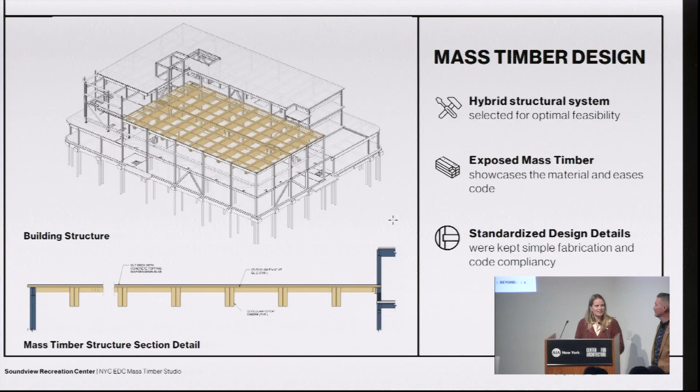Alongside that, the team also chose to keep the structure rather simple and straightforward. It's a long span glulam beam structure with a CLT deck and a concrete topper. So very standard details, and this also eased a lot of the compliance challenges throughout the project.

Although the mass timber was just isolated to the gymnasium roof, we found through the life cycle assessment of the embodied carbon of the structure, it still has a substantial impact on the life cycle of the project. So just this simple substitution, we see a 6% reduction over a typical steel frame roof. And if we count the carbon stored in the mass timber components itself, the biogenic carbon, we see a 21% reduction.

And although those of us well-versed in LCA know that it's not always straightforward to just simply count all that carbon storage, we know at least that carbon is being sequestered out of the atmosphere for the lifetime of the building. Hopefully afterward, if we have good circular design frameworks. So we know it's still providing a climate benefit. It's slowing climate change.

So in terms of lessons learned, John's also mentioned this as well. Mass timber was kind of a natural choice at the beginning of the project, but it has reinforced a number of the Parks Department goals, the city agency goals, and the larger city climate goals, particularly since this project must pursue LEED Gold, and we're hoping it goes even to platinum. This is reinforcing some very specific LEED credits that we hope to pick up through this mass timber design.

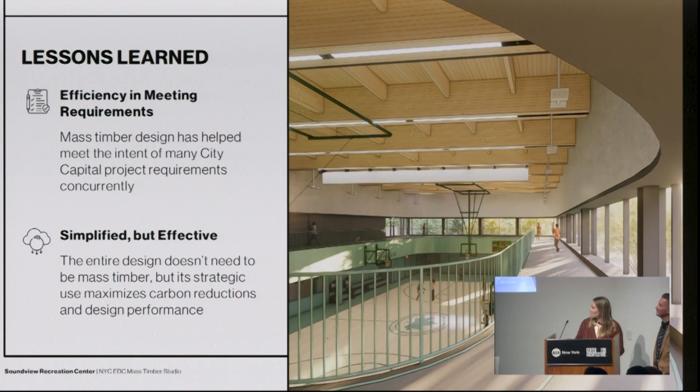So next stages: this project just passed its 100% construction documentation deadline, which was a big milestone for the team. Of course that's not the end of the challenges, and other projects have touched on this too. Procurement, particularly for mass timber, is going to be our next hurdle, because this is a Parks Department project, a capital city project, subject to open bid requirements, which means we can't pre-select a single supplier or product before we get the final bid.

So we'll be working closely with the contractor that's selected and the final suppliers chosen to ensure we can still sustainably source this timber, as well as meet many of the other material requirements that LEED dictates. Beyond that, we'll also continue to work with city agencies. This project is subject not only to the New York City Building Code, but a number of other specific agency requirements, so we have to continue working with them to meet all these requirements.

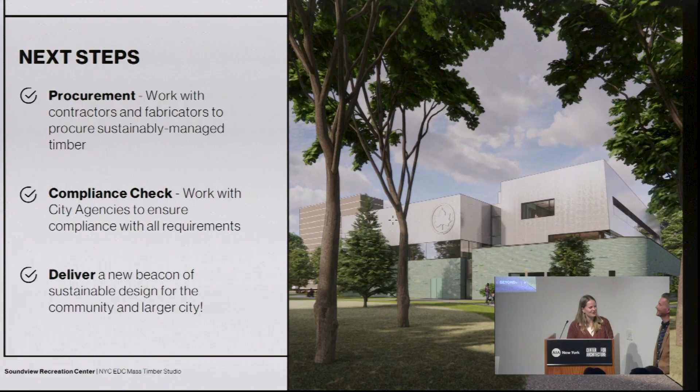But we're finding mass timber has really brought together, or satisfied, a number of these intentions already. So with that, we hope by 2029 to have delivered a new beacon of sustainable design for this community and the larger city. Thank you.